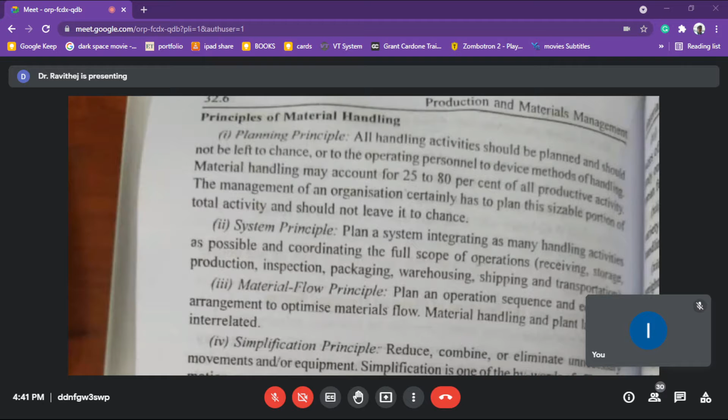So that's the planning principle. Next one is the system principle - plan a system integrating as many handling activities as possible and coordinate the full scope of operations: receiving, storage, production, inspection, packing.

It is a cycle. Material handling is a kind of cycle. It starts from receiving materials, storage, production, inspection, packing, sending to the godown, and shipping to the customer's destination. So it is a complete system of activities, interlinked with each other.

It is connected with a few other functions also. So it's a planned system.

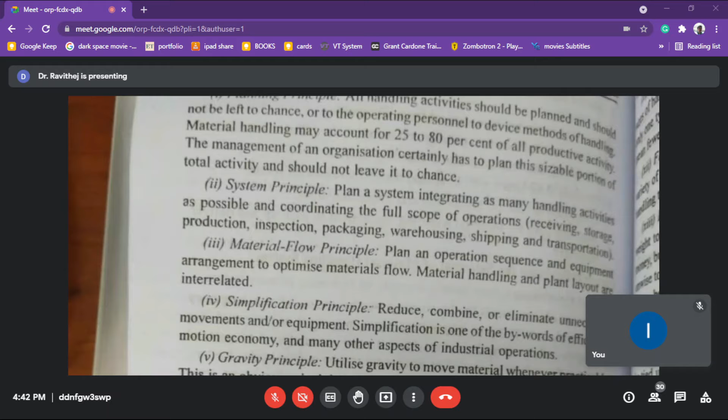Material flow principle - it's all about the flowing principle. Material handling is not about inspecting or placing or locking materials in a place, but it is a flowing principle. Flow means a moving principle - material will move from one place to another. Materials handling is all about the moving principle; it moves from one place to another place.

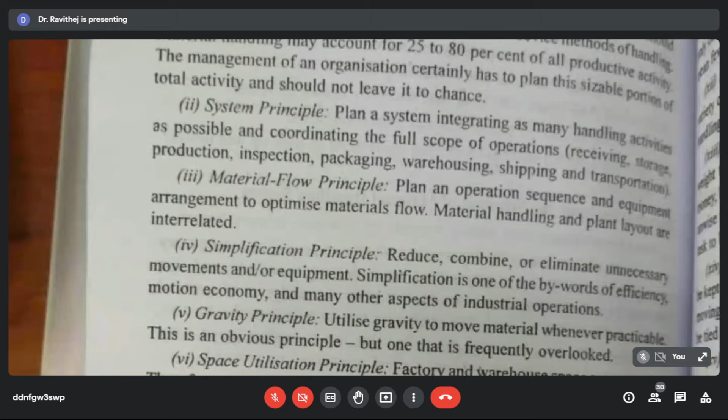This is all... Just a minute. Are you able to see the screen? Yes sir. Right, thank you.

So far we discussed three principles of materials handling. Another principle is the gravity principle. We know the literal meaning of gravity.

Utilize gravity to move materials where practical. This is an obvious principle, but one that is frequently overlooked. The gravity principle is known to everybody.

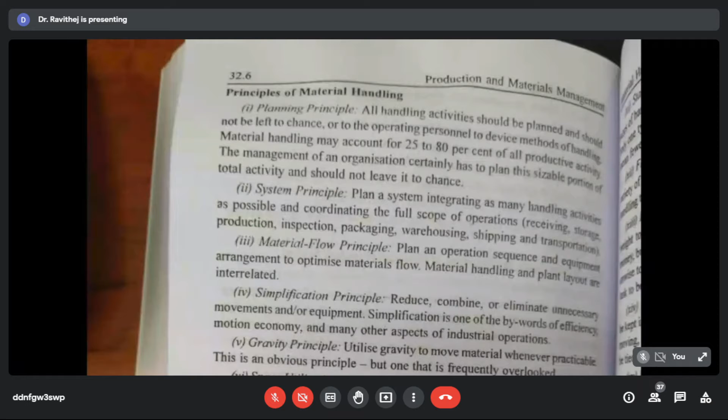So we know what gravity is. When you are handling or moving equipment, generally we place it in a remote position and use gravity to move it instead of using fuel and electricity power. We use gravity so that we can minimize fuel, gas, and electricity charges. So gravity is another kind of principle.

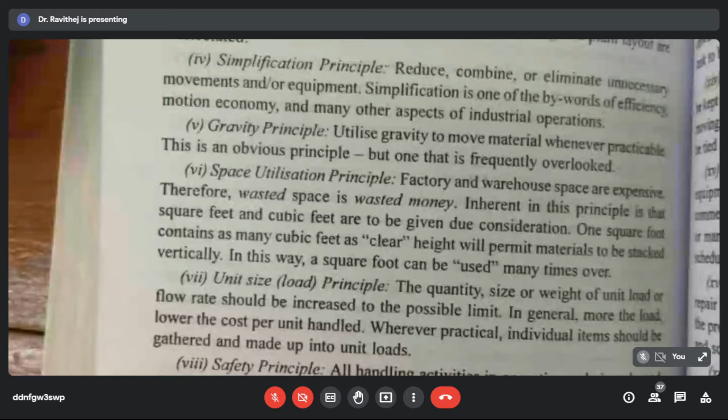Space utilization principle - we have seen what space utilization is. A good storekeeper should use his space very optimally.

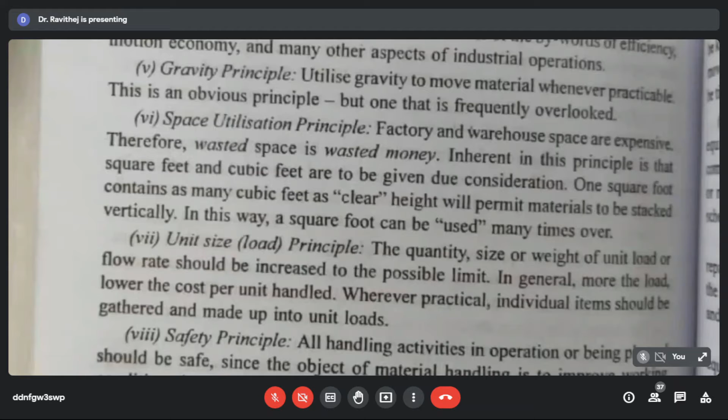Next is the unit size principle. The quantity, size, or weight of the unit load or flow rate should be increased to the possible limit. So in general, the more the load, the lower the cost per unit.

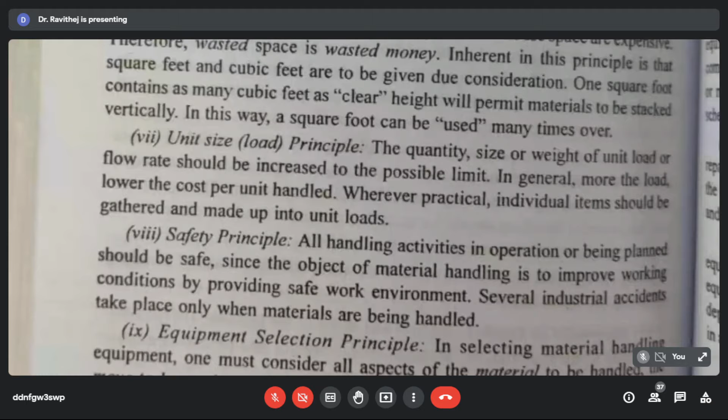When you are moving material, the maximum material should be moved in a single truck, so that we can reduce the transportation cost and obviously reduce the unit cost of that particular quantity of material.

Safety principle - we know safety is very important. The biggest challenge in material handling is the safety principle. Generally, more accidents occur when you are moving material with equipment, so labor loss will always be there, and labor must exercise utmost care while moving material.

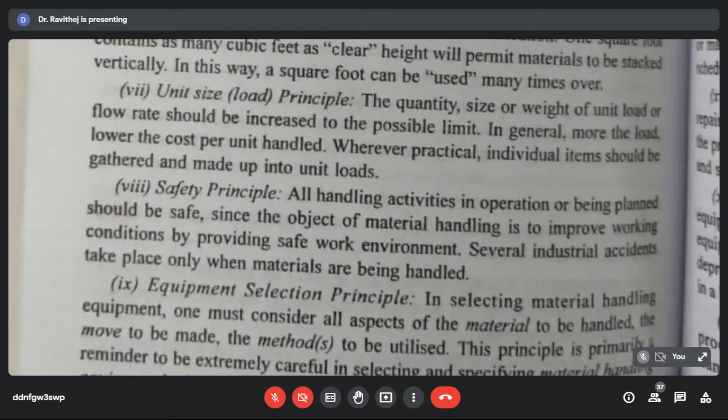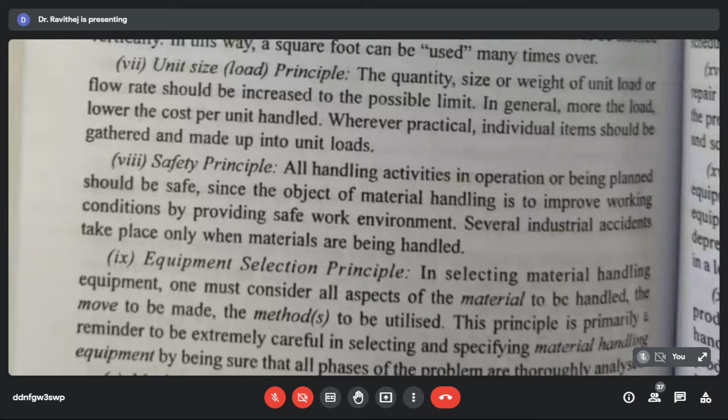So labor should be given proper safety shoes, helmets, equipment should be in good condition, and the labor should be trained in a scientific way of moving material. Otherwise, accidents may occur. So safety is another principle.

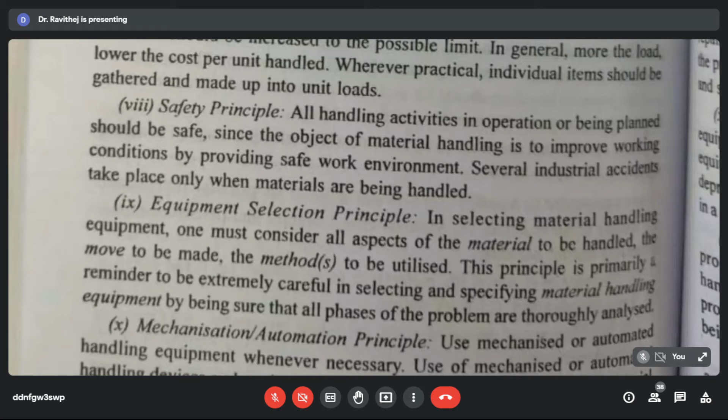Equipment selection principle - selection of equipment to move the material. According to the material and purpose, the equipment used to move the material will change. Sometimes we use a forklift, sometimes trucks, sometimes bin carts to move material, depending upon the requirement.

Next is the mechanization and automation principle.

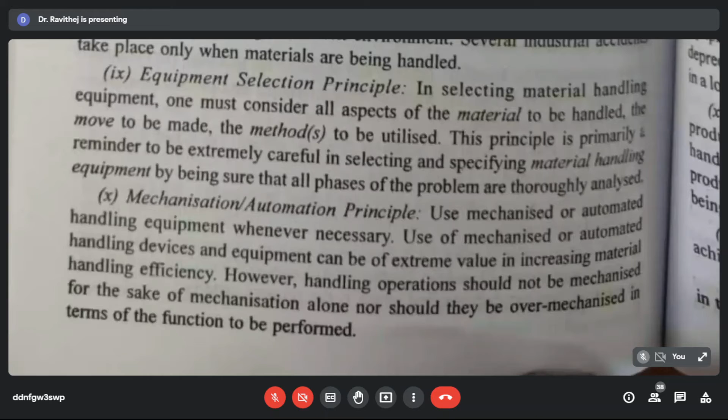Sometimes instead of moving material manually or with the help of trucks, jigs, and automations, we may automate the concept. For example, we might have seen some bottling industries where automatically one machine moves material to another, one machine washes the bottle, and with the belt it goes to another machine where liquid is filled, followed by packaging, until everything is automated. So that principle is also being fixed.

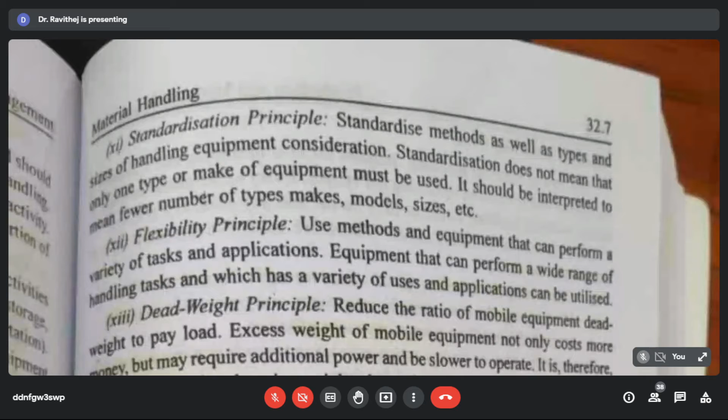Standardization principle is very very important. The material which you are handling gives good quality to the finished product. If you make any damages in handling of the machine materials, this will reflect in the quality of the work. So standardization principle is equally important.

Flexibility principle. Flexibility means it can be changed at any part of time. The principle which you are following should be able to change at any part of time.

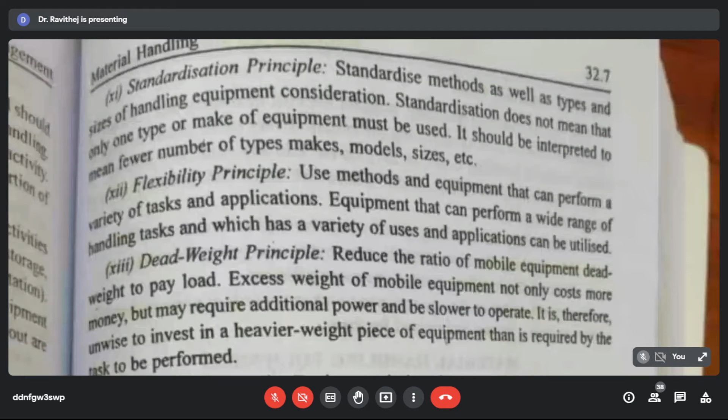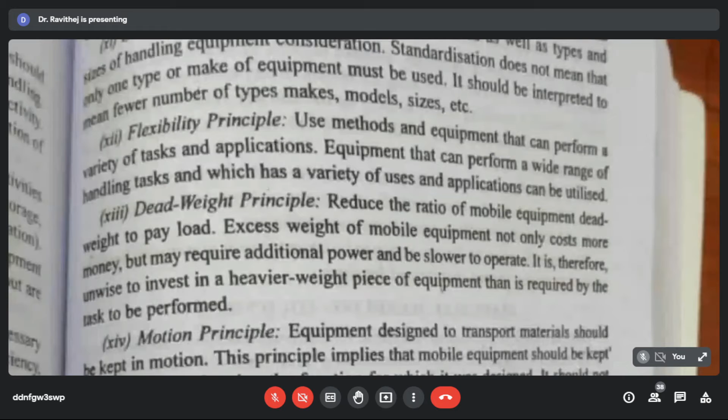Deadweight principle: reduce the ratio of mobile equipment deadweight to payload. Excess weight of mobile equipment not only costs more money but may require additional power and be slower to operate. In our previous principle, we saw that maximum materials should be transported in one single trip, but this has drawbacks. If you load more weight in trucks or forklifts, it consumes more power, increasing power consumption, which in turn increases overall expenses per unit.

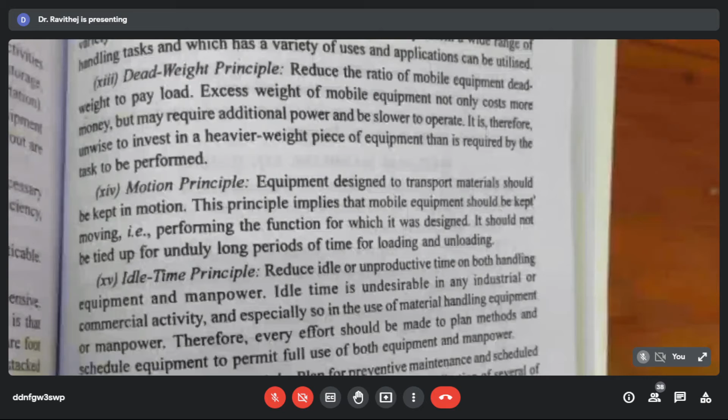Motion principle: motion means movement in parallel motion. Equipment designed to transport material should be kept in motion, always in movement. This principle implies that mobile equipment should be kept moving, performing the function for which it was designed.

Idle time principle. Idle time is the biggest enemy to the production unit. You should see that there is no idle time because of lack of materials, lack of power, or lack of labor. Reduce the idle time or unproductive time on both handling equipment and manpower.

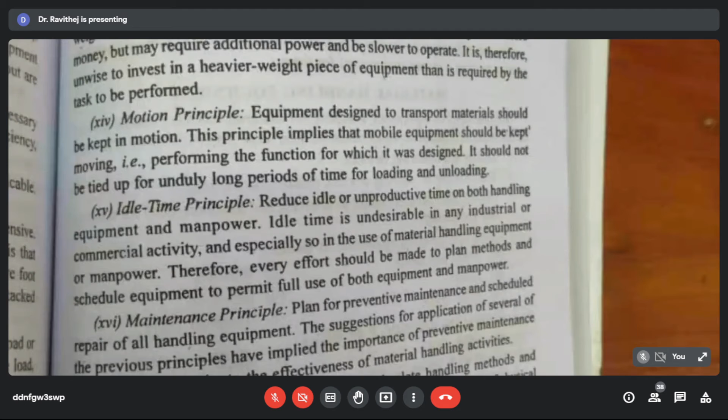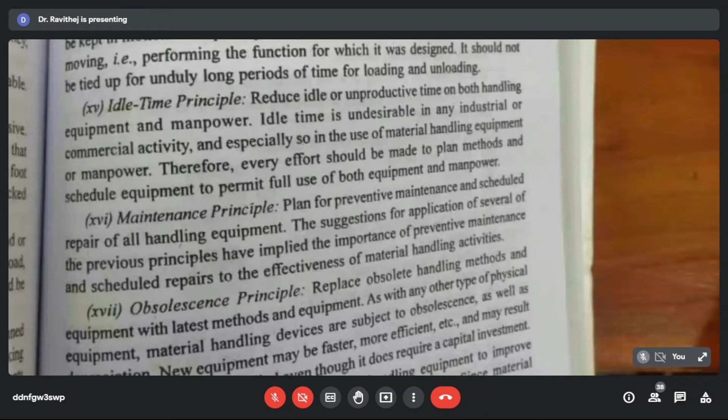Maintenance principle: equipment should be maintained early in advance. You might have studied breakdown maintenance and preventive maintenance in production. You should have preventive maintenance with the equipment so that it is always in running condition, which helps minimize idle time.

Obsolescence principle: obsolescence is the last stage of the product. Outdated handling methods and equipment should be replaced with the latest methods and equipment. Physical equipment and material handling devices are subject to obsolescence, as well as depreciation. The equipment will always have depreciation, so you should check the material and follow the obsolescence principle.

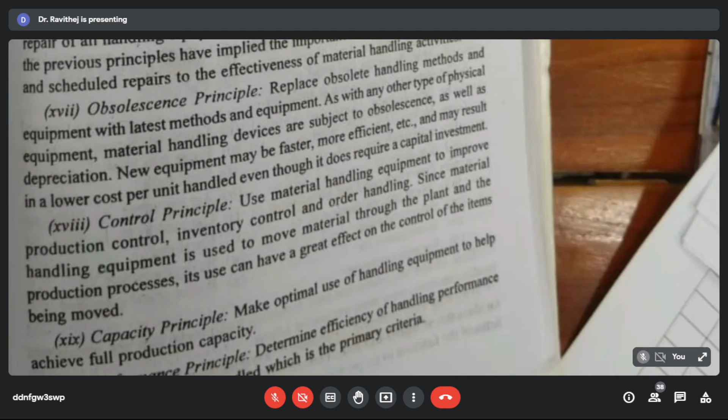Control principle: use material handling equipment to improve production control, inventory control, and order handling of materials. Capacity principle and performance principle are also important. Capacity means more productivity. Performance is about quality and quantity on time.

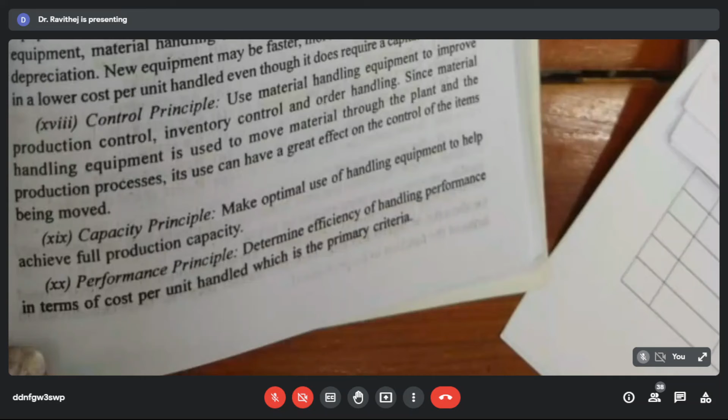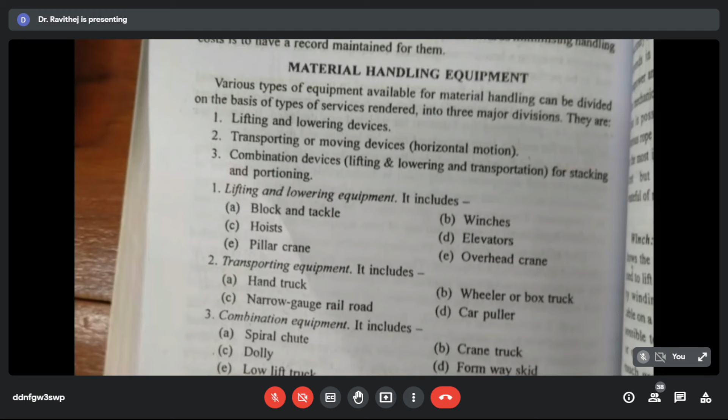Now let us see what material handling equipments are available. Various types of equipment available for materials handling can be divided, based on the type of service rendered, into three major divisions: lifting and lowering devices, transporting devices, and combination devices.

A few equipments are used only to lift and lower devices, for example forklifts, JCB machines, and other lifting equipments, which only lift and lower. Transporting or moving devices work on horizontal motion - there are trucks and wagons used to transport material horizontally. The first type helps move materials vertically, while this type moves them horizontally.

Combination devices perform both lifting and lowering and transportation work. Here both machines work simultaneously - one lifts and loads material into the wagons, and the wagon moves horizontally towards the work spot.

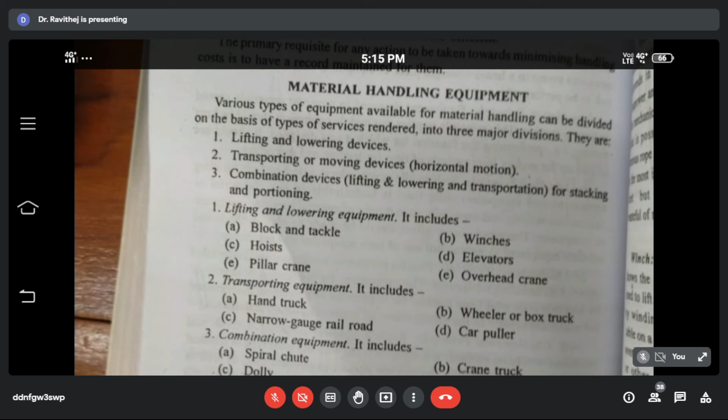Lifting and lowering equipments include block and tackle, hoists, pillar crane, winches, elevators, and overhead cranes. Let us see examples of all these.

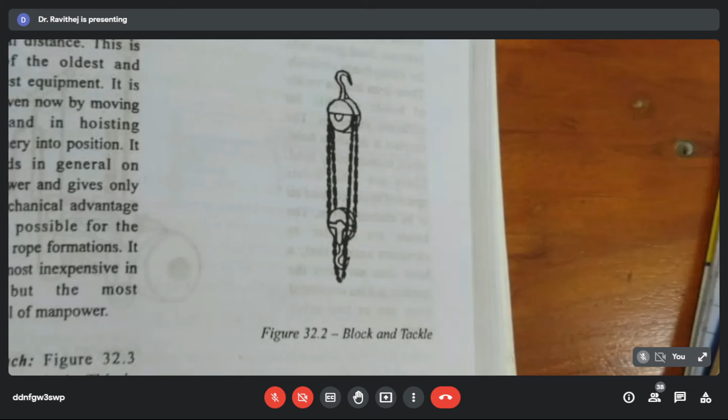Let's see the block and tackle. You might have seen this equipment which is used to lift heavy weight loaded parcels and packets. This is another kind of machine.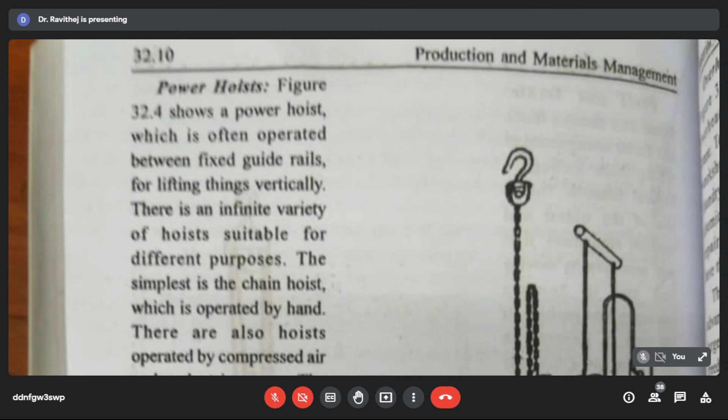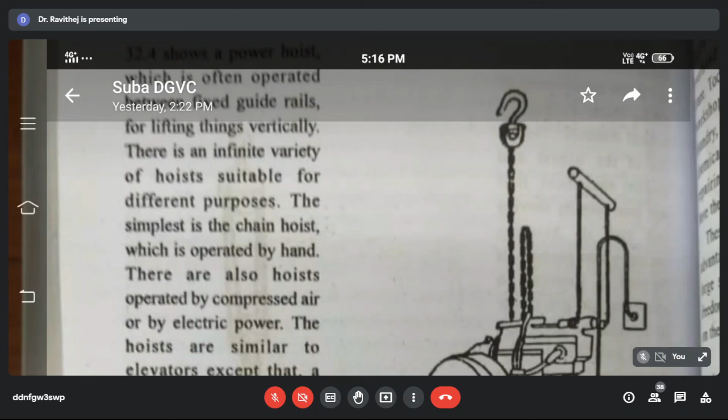Another equipment is the power hoist. It often operates between fixed guide rails for lifting things vertically - anything to be lifted vertically, these machines are used. There is an infinite variety of hoists suitable for different purposes. The simplest is the chain hoist, which is operated by hand.

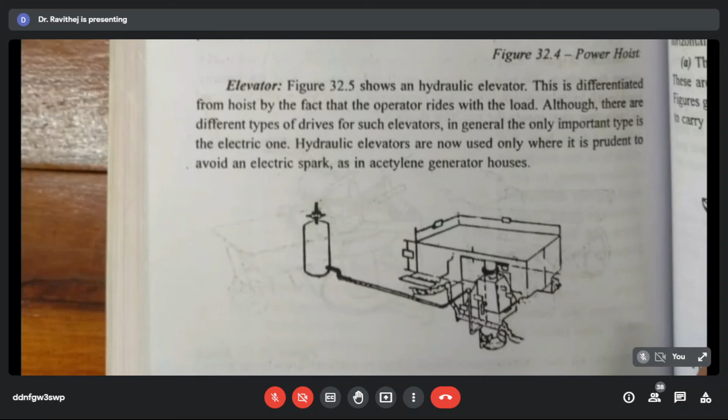Another one is the hydraulic elevator, which uses hydraulic power to lift material, like a JCB machine which works based on hydraulic power only. This is called a hydraulic elevator.

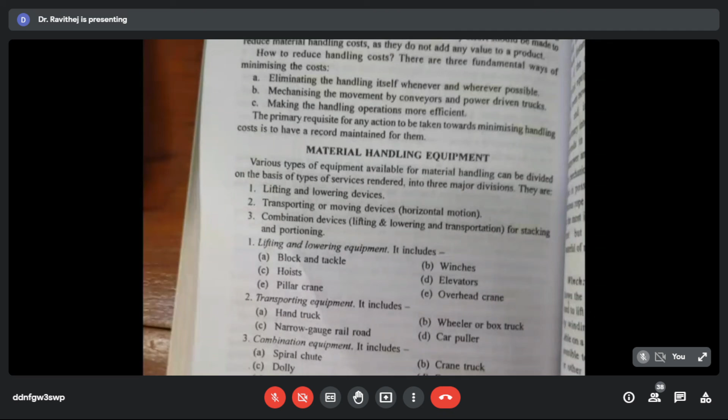So these are the materials handling equipment. With this, the chapter becomes over.

Praveen, Vinay, are you available? Praveen? Sir?